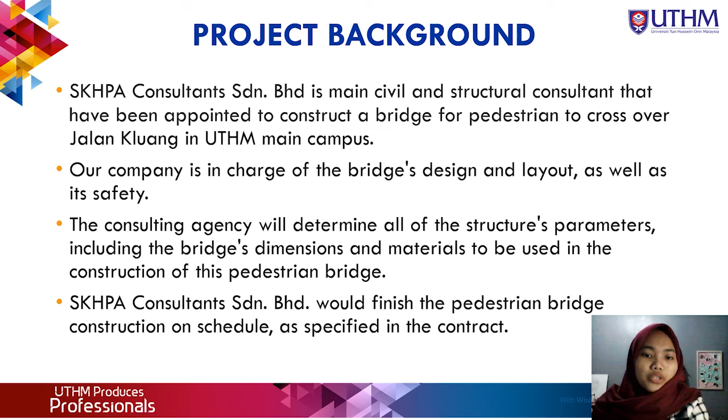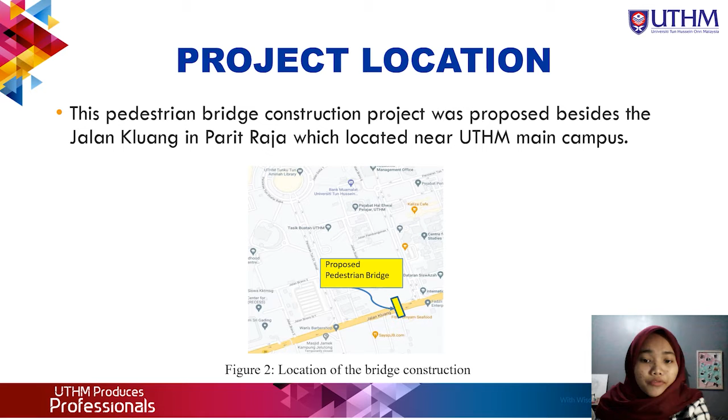Project location: this pedestrian bridge construction project was proposed beside Jalan Kluang in Parit Raja, located near UTHM main campus. As you can see in figure 2, here is the location of our bridge construction.

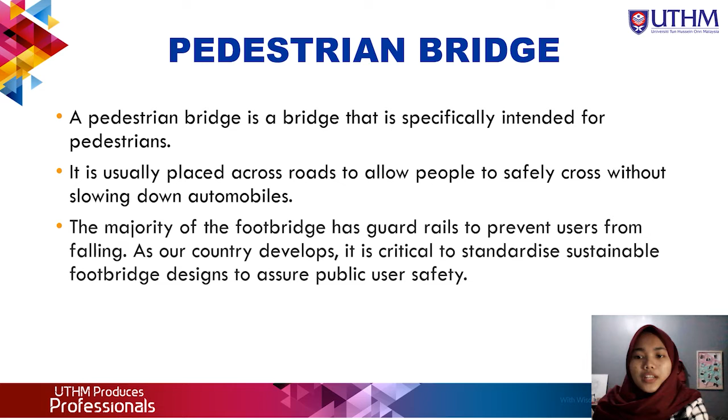A pedestrian bridge is a bridge that is specifically intended for pedestrians. It is usually placed across roads to allow people to safely cross without slowing down automobiles. The majority of footbridges have guardrails to prevent users from falling. As our country develops, it is critical to standardize sustainable footbridge designs to ensure public user safety.

This is the detail of our structural design, with our proposed pedestrian bridge length at 21 meters and our proposed pedestrian bridge width at 1.6 meters. The permanent load is 17.9 kN per meter and the variable load is 6.8 kN per meter, with short-term losses of 10% and long-term losses of 20%.

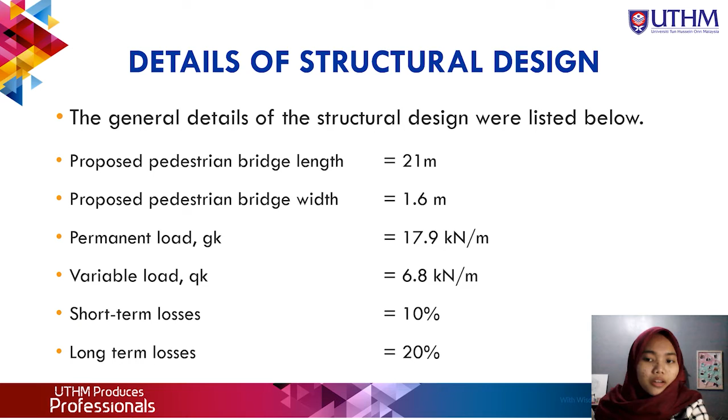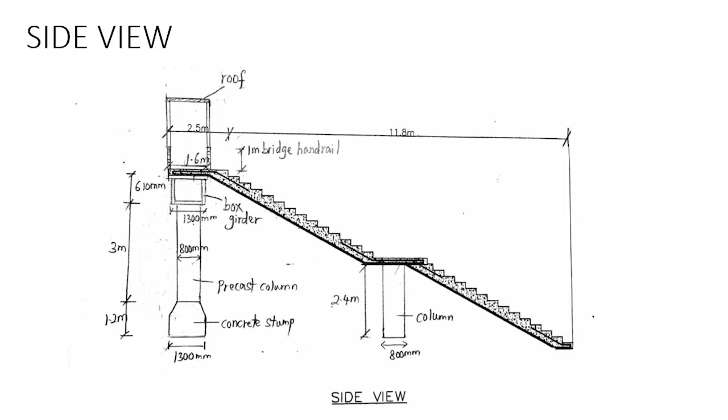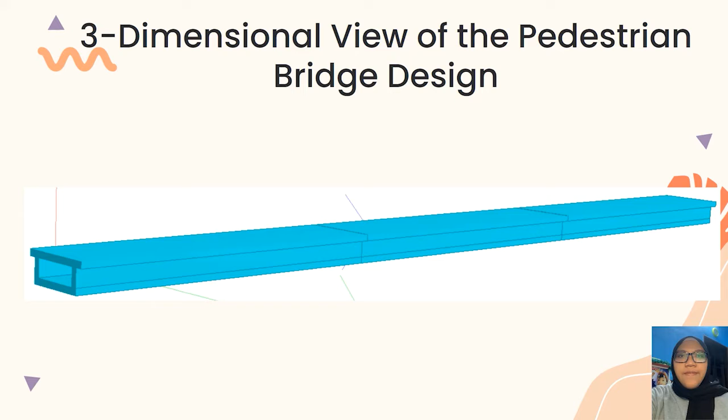A box girder, in which the main beams comprise girders in the shape of a hollow box, was used to design this pedestrian bridge project. Several rectangular sections were used to design this box girder. The summary of the section properties subjected are shown as below.

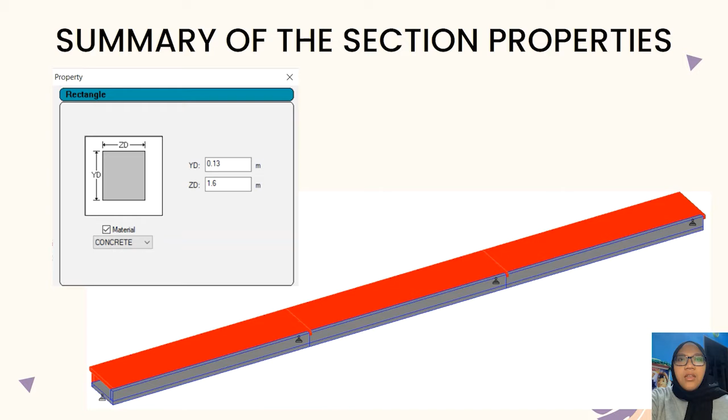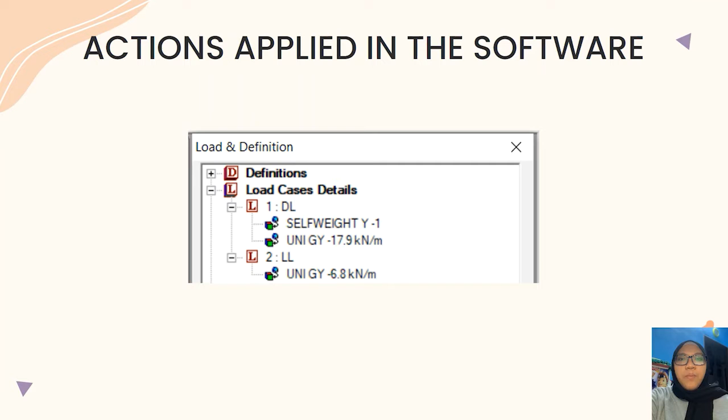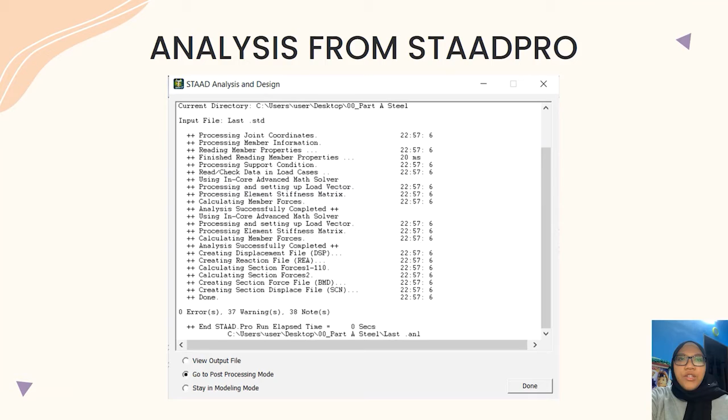The actions applied in the software, where the total GK and QK, are 17.9 kN per meter and 6.8 kN per meter. Based on the STAAD Pro analysis and design, the proposed design for the pedestrian bridge is adequate and passed. The 3D layout of the proposed pedestrian bridge is shown in this video.

This 3D layout serves as a visualization of the pedestrian bridge after the construction has been done. SketchUp software was used in this project to portray the 3D modeling for the pedestrian bridge.

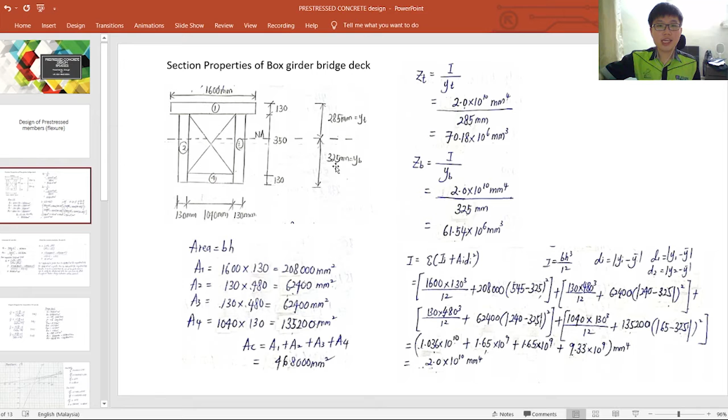Next we need to determine the moment of inertia by using the formula, and then we will get the modulus of section ZT and ZB. Basically, for ZT and ZB, we need to determine YT and YB also. For YT from the neutral axis it is 285 mm, and for YB it is 325 mm.

Next, we need to calculate the moment for the self-weight and also the moment for the total service load. This is the MI value and also the MS value. Next, we need to check the section modulus based on the inequality of 9.3a and 9.3b, and we can determine whether our proposed size passes or not. Basically, from the calculated value, you can see that the design passes and is able to satisfy the ultimate limit state.

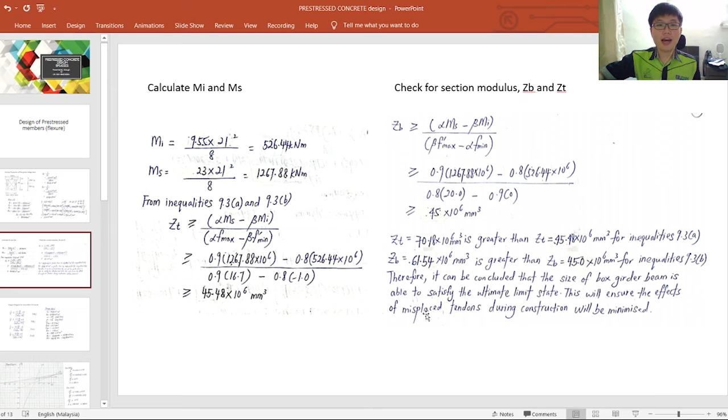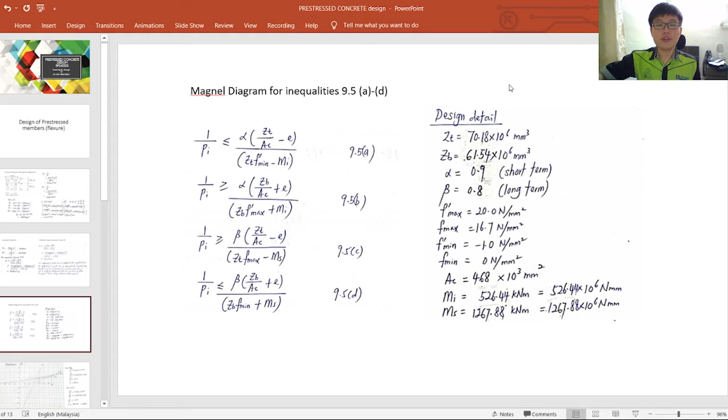Next, for constructing the Magnel diagram, we need to consider 4 inequalities, which are 9.5a to 9.5d. This is the design detail that we'll use in our design. From the inequality, we can plot the Magnel diagram graph, and basically this is the shaded region.

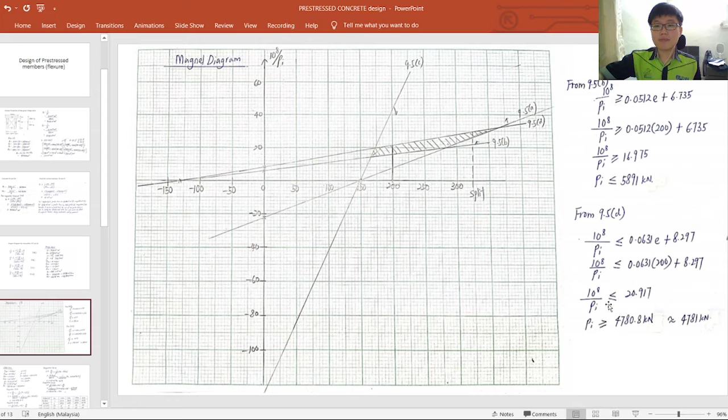We can observe that the 200 mm eccentricity will lie on the shaded area, and the limit is controlled by the inequality of 9.5b and also 9.5d. Therefore, from the inequality, we get the pre-stressing force must be less than 5,891 kN, and the limit must be at least 4,780.8 kN. Therefore, we will consider this as the limit.

Next, for constructing the cable zone, we need to classify according to the different distance from the mid-span, and we construct the table in our project. Basically, we can observe the Mi and Ms will continuously increase as the distance increases, and the eccentricity will also change accordingly.

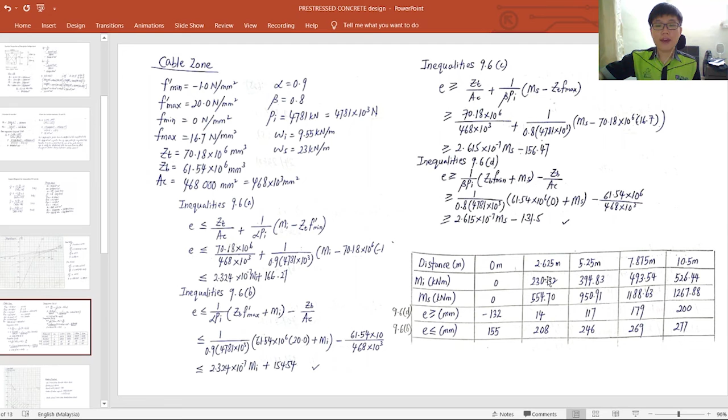From the inequality, we use 9.6b and 9.6d to have the result. From the table of results, we can construct the cable profile, and we provide 7-wire and 15.2 mm diameter, and we assume the initial prestress is 70%, and therefore we provide 23 wires.

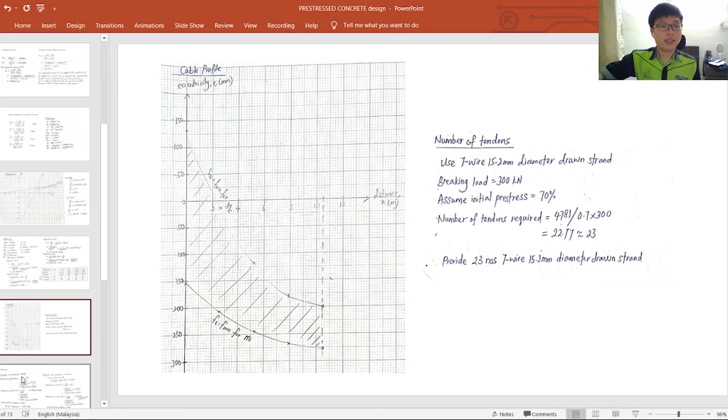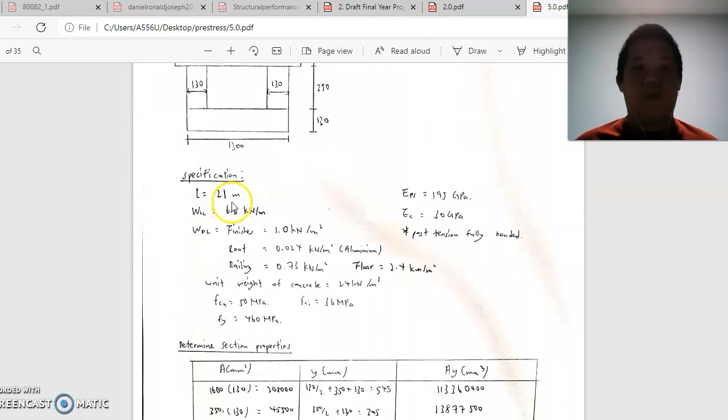Ultimate moment of resistance. Okay, first of all, this is our specification. Our span is about 21 meters, and GK is about 18.2, QK is about 6.8, and then we check the ultimate moment.

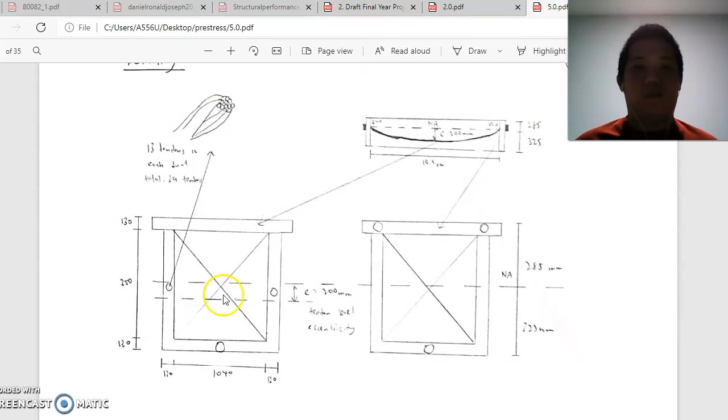So the checking MU is greater than the MED, so the moment is passed. So this is the detailing of our box girder. This is the graph we plot to know the checking of the ultimate moment.

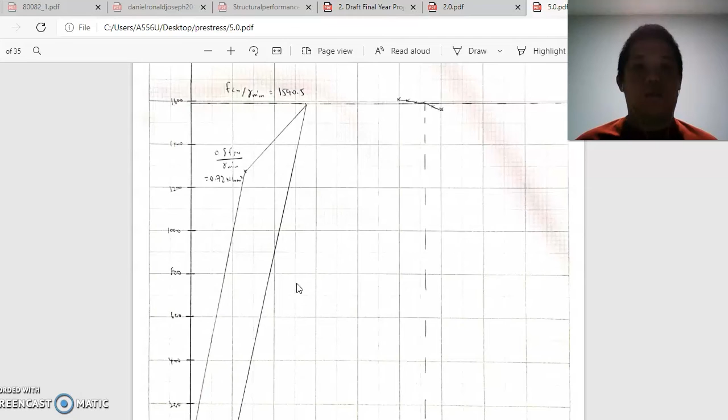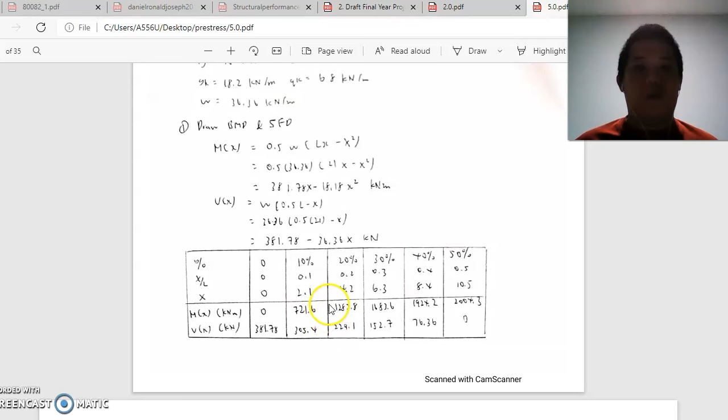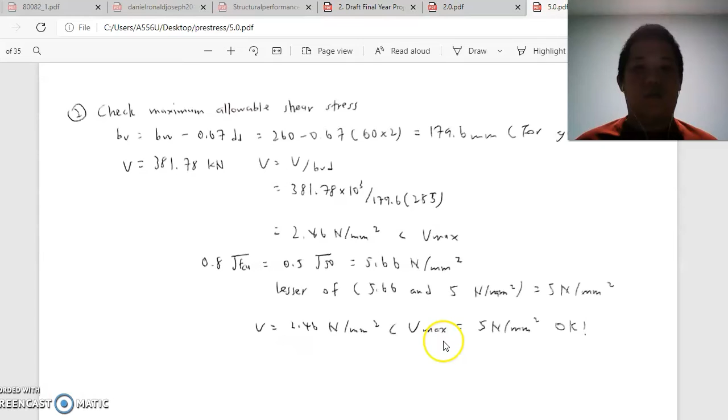Next we check the ultimate shear of our box girder. First we draw the BMD and SFD. We use the table to know the MX and the VX, and then check the maximum allowable shear stress. The Vmax is greater than V, so the shear is passed.

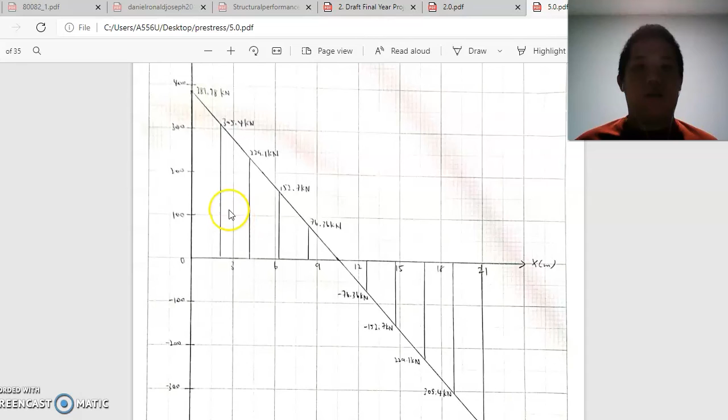And then this is our shear diagram, shear force diagram, SFD. And then we also plot our BMD. This is the BMD. So this is the section cracked, and this is the section uncracked.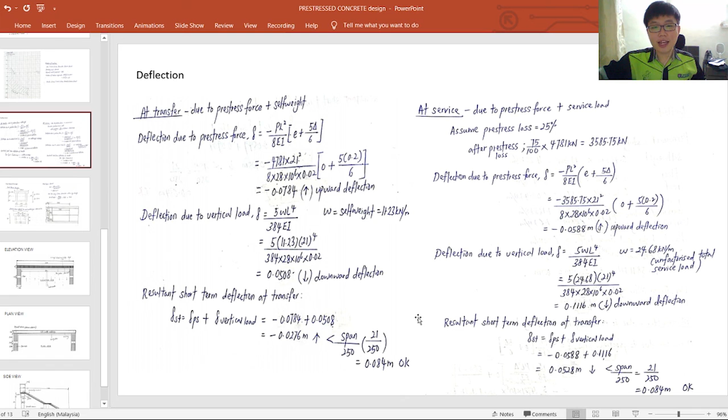And we need to calculate the deflection due to the prestress force and also due to vertical load. From the calculated value, if the value obtained is negative, it means it will deflect upward, and if we obtain a positive value, it means it will deflect downward. We need to check the resultant deflection, either at transfer or at service, is greater or lesser than the allowable deflection. Based on the result, it's lesser than the allowable limit, therefore the deflection is okay.

Next, for the end block design, we design for the triplet anchorage with a jacking force of 1000 kN. The maximum bursting force is 690 kN, and therefore we will calculate the AS required and we provide the link.

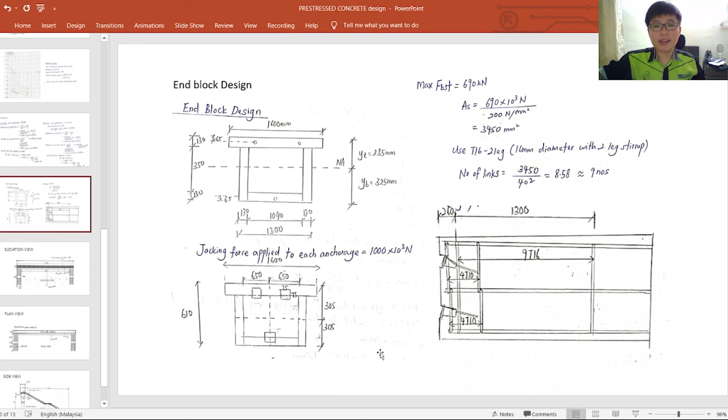Basically, this is the detailing for the end block, and then we provide 4 T10 for the individual prism, and for the overall prism we provide 9 T16. That's all for me. Thank you.

For the conclusion, the overall outcomes according to manual calculation is satisfactory. The analysis from the STAAD Pro software confirms that the design system has no errors. To summarize, the primary goal of this project is to build a high-quality bridge at a minimal cost.